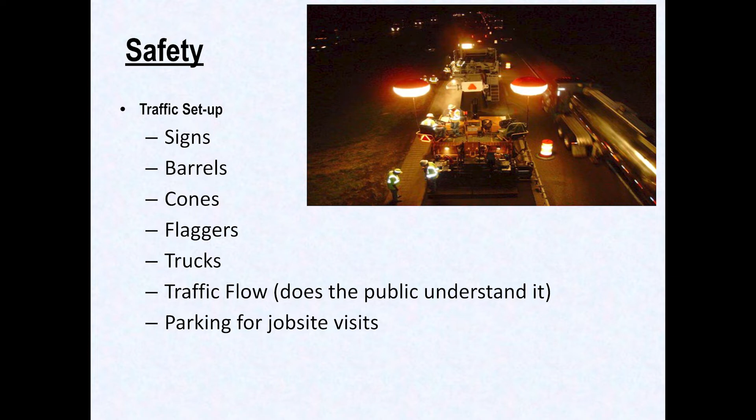When we start out, we always start with safety. We're thinking about best practices, and some examples here are our traffic setup with signs, barrels, cones, flaggers, trucks, the traffic flow, does the public understand it, and parking for the job site. I know some of these things seem elementary, but we've had several incidents within my own company of our own vehicles getting backed into by where we parked. I know that sounds corny, but these are things to think about throughout the day.

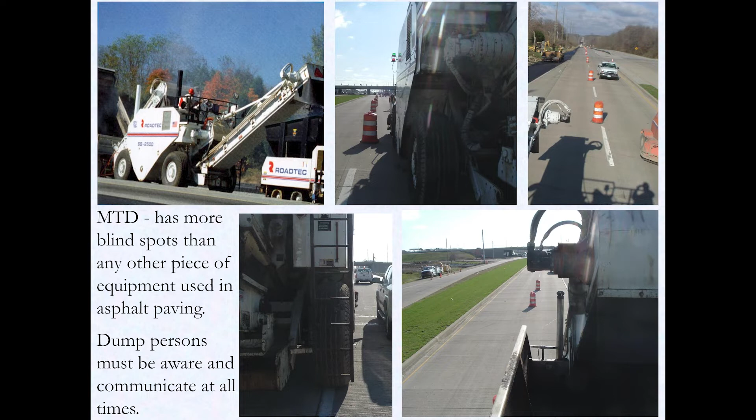One of the key points here, we're all around these a lot - paving, obviously, they're required - but a shuttle buggy has more blind spots than any other piece of equipment used in asphalt paving. That's a fact. Lots of blind spots. So the dump person must be aware and communicate at all times, which I think sometimes the dump person is key, just like flaggers on our jobs. We shouldn't take these people for granted. Sometimes we want to put the least experienced person at these positions, but they're very vital in what we do.

Something else to think about in our best practices is prep for paving, is traffic control. We heard Brian earlier, and Scott talk about milling and cleaning, the day and night joint prep, tack, haul trucks. All these things we've talked about earlier in the technical forum all apply to best practices and troubleshooting on the job.

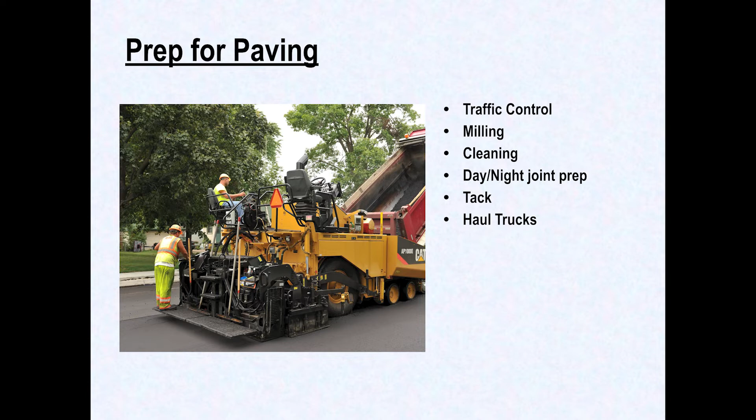Some of the lay down best practices - again, communication is key - but you've got the plant operator involved, the dump person, the buggy person, the paver operator, the screed operator, the laborers, roller operators, the QC/QA tech, and the paving superintendent on the job. That doesn't count any outside forces. So you think about all those people and trying to get them on the same page, let alone dealing with the traveling public.

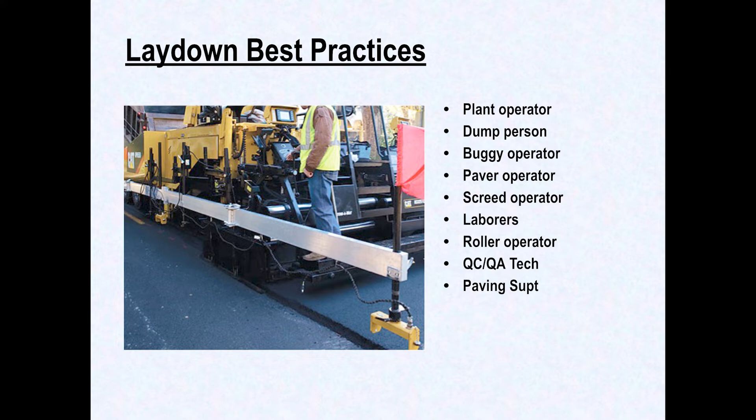Dump trucks - we all love truck drivers, right? So how many trucks do we have? Where are they going? What is the route? Is there overhead lines or obstructions? Are they marked? This all affects our paving train every day. Do the loads need to be tarped? And again, is there a dump person? The dump person should know how many trucks you're starting with, etc. What's the path? If the truck drivers have any questions, obviously the first person they're going to speak to is the dump person, who would be getting the ticket.

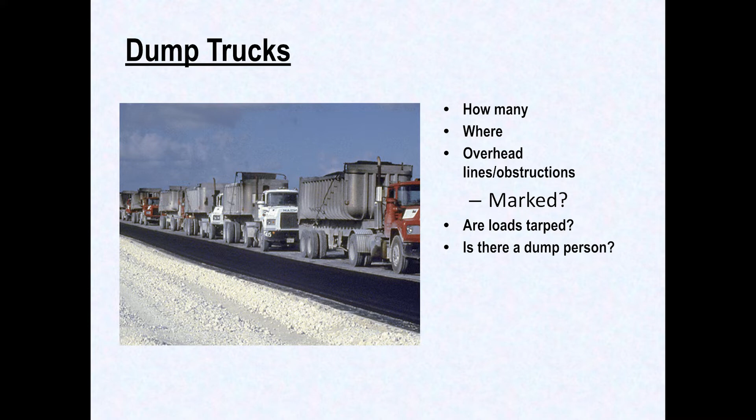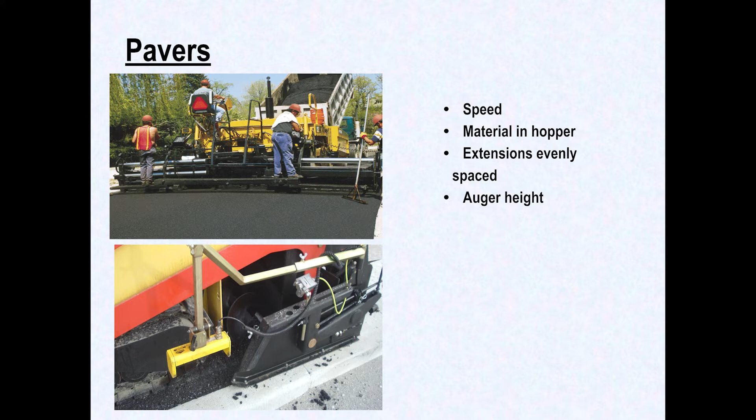On our pavers - something we all know, but it does apply to the end product - is the paver speed, material in the hopper, are the extensions evenly spaced, auger height, which can obviously cause segregation, etc., all leading to many problems.

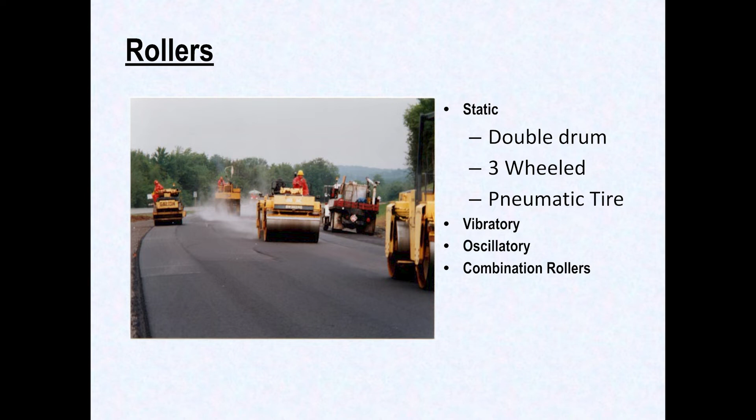Our rollers - different types of rollers, you pick the right roller for the right application: double drum, 3-wheeled, vibratory. What's the combination of the rollers? These are all things with this certification, or education, whatever we want to call it, that should help us understand what we need to give the best product. And there's more than one way to skin a cat, and there's multiple companies in here, and I think we all do a great job. These are just small things to think about.

And then the vibratory rollers - again, we talked about speed, impact, spacing, and all these things. Brian and others talked about it, but also check your amplitude and frequency. We're trying to achieve density. One roller may come from one spot to another, one may break down. The pattern, depending on your roller pattern, you want to make sure you're on high amplitude, low frequency, or vice versa, but they should all be set the same. That way you get the same compaction across the mat.

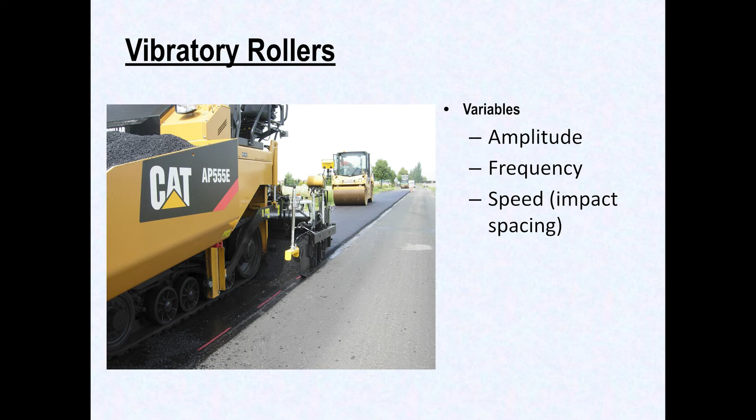Roller speed here, they need to know the number of passes for the breakdown roller, frequency zone, tender zone - that's temperature related, we talked about that earlier, which obviously thickness affects that majorly. And then the roller width and the paving width.

A lot of days we do have the capability to lay wider than 12 feet.

I was going to make fun of Brian, but he's gone. He made me feel good earlier when he said 1986 - I thought I was getting old. I was in 7th grade then, so it made me feel better about myself anyway.

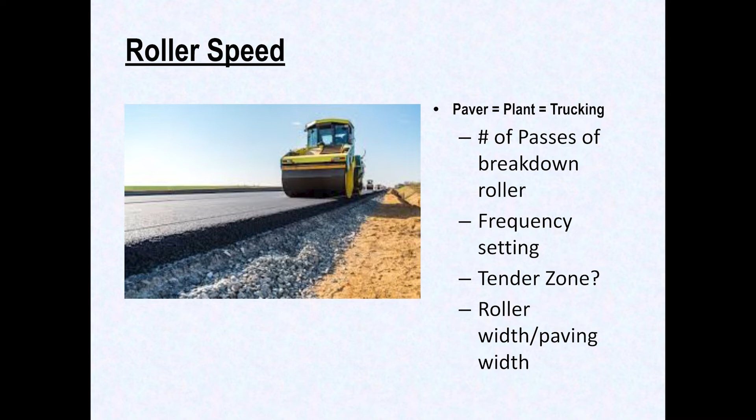And then here's some math. There are some patterns here, math equations to help figure out types of rollers, coverage, speed, passes - gives you a percentage of feet per minute based on the paver speed, etc.

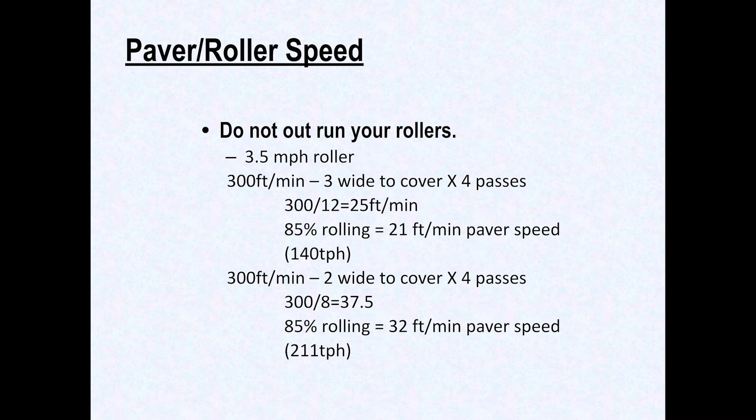Again, not talking down or elementary - we got super technical, and now we're getting elementary. But when we run the roller, we should turn towards the shoulder, away from traffic, stop at an angle. I know some of you are laughing, but I've been several places and watched people stop straight, literally.

Won't mention any names, but it's a pet peeve of mine. Make sure the vibration is turned off before stopping. That's obvious to us in this room, but this is for us to take to our people and educate, especially the newer people that we get every day.

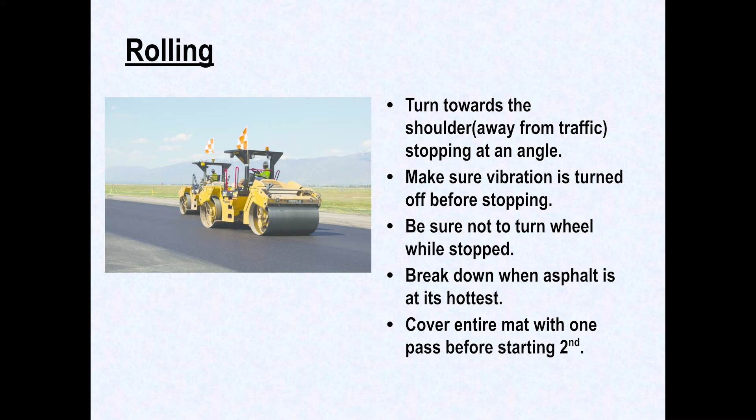We need to know the breakdown when the asphalt is at the hottest, and then cover the entire mat with one pass before starting the second - that's based on how many rollers we're actually using.

The rollers continue to take previous stop marks out with the next pass. As the pavers move forward, roll up to the paver with each pass to seal in the heat - it's very important. If we're in a parking lot or private work, roll hand work as soon as possible, or we obviously get some segregation when the rocks come to the top.

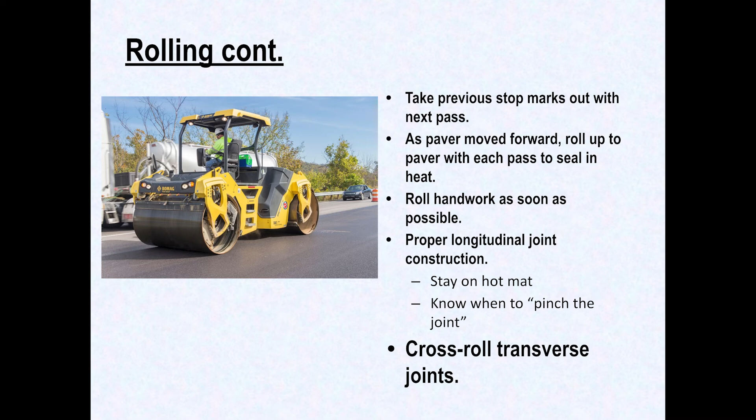Stay on the hot mat. Know when to pinch a joint - it's very important. And cross roll transverse joints when possible.

Distributors - this is a big one for me. Brian talked about it earlier. Proper application of tack.

Two things - we are going to spray pavers on some jobs. Not advocating for or against it, but some of those issues - I don't want to speak for the department, but I've been in some meetings - is the bonding issue. If we don't get a good tack coat, don't use the right material, don't shoot it at the right application, we've all seen the shuttle buggies pick it up.

That's how I always find a job now, is I just follow the truck tires, and I know where the county road we're paving is, because you can see tack from there to the plant. But cleaning the surface too is a big deal.

And then I put on here the correct nozzles. That sounds odd, but when we chip and seal or things like that, we use different size nozzles. We need to make sure they're clean and we're getting good coverage over the entire width of the mat we're going to pave on, or the milling surface.

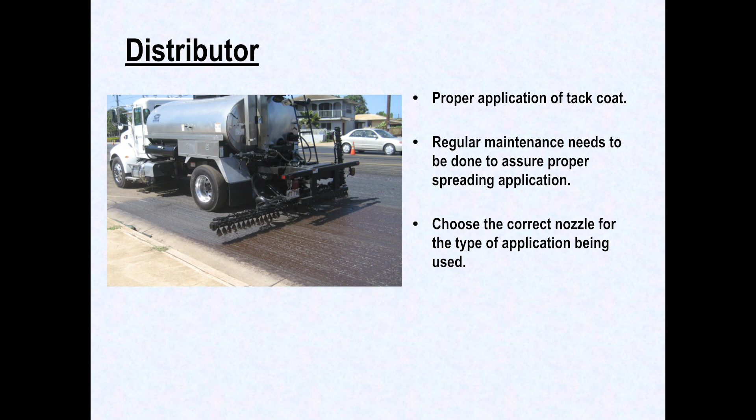I was very good and quick there, but I do mean we are all experts, and those are just a few small examples. One key thing here that I do want everyone to understand is it's been a long day - you go through this.

Hopefully you picked up on some things, but it is called field supervised training. I grew up in the field. Sometimes I miss the field.

But it's important - we preach that INDOT or any entity we're working with, problems need to get worked out in the field. That's what this is about. So know your spec book, learn from this. You guys are the experts, and try to work it out in the field.

It'll only benefit us and the department where we're doing the proper application - they're getting what they want, we're getting paid for that, that's what we want, and at the end we both get a quality job. But I know it's been a long day for you guys. I appreciate it, and thank you.